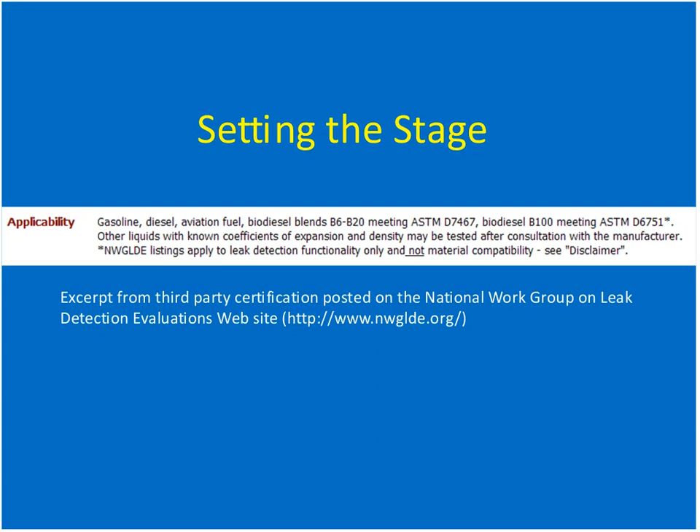Curt Johnson has been an environmental engineer with the Alabama Department of Environmental Management since 1984 and has been in the UST compliance program since 1989. Curt's duties include the review of cathodic protection designs and tests, the writing of new and revised UST regulations, and providing technical support to the UST compliance section concerning leak detection and cathodic protection issues. Also, Curt is currently chair of the National Workgroup on Leak Detection Evaluations, which he was instrumental in forming in 1993. Curt has a BS in Civil Engineering from Michigan Technological University.

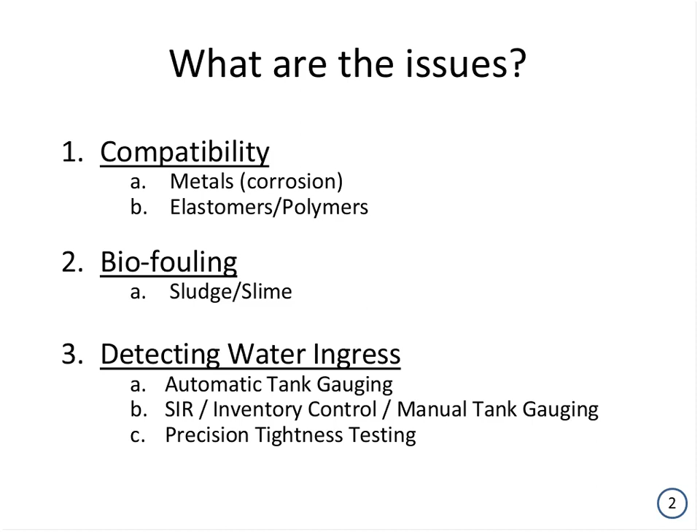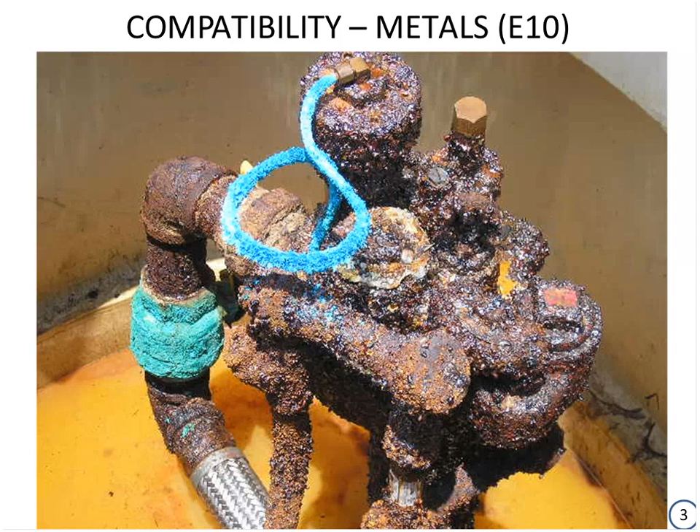But when we say metallic corrosion, I think we're all familiar with this compatibility issue we have with ethanol blended fuels, namely seen within containment sumps at the tanks. This is fairly common these days. We think we've got a pretty good understanding of how this is happening, so we'll discuss how it's impacting our leak detection ability.

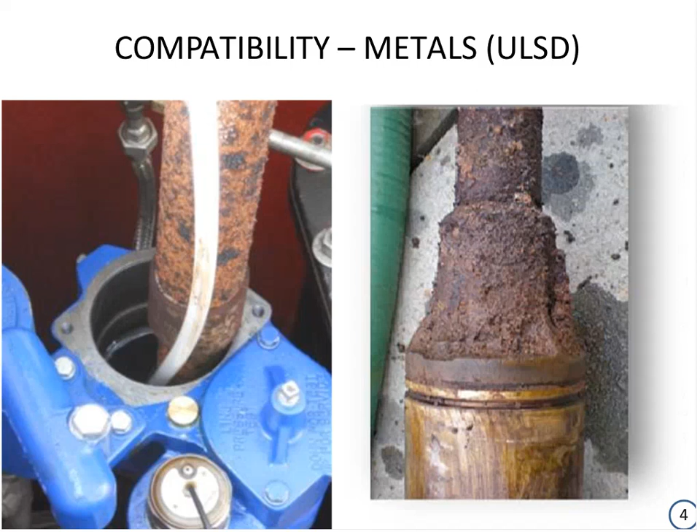We'll also talk a little bit about what's going on with ultra-low sulfur diesel and/or biodiesel blends that are causing some of these same sort of issues with this crud, for lack of a better term.

One of the things that probably has the biggest impact on leak detection right now is our mechanical and electronic automatic line leak detectors failing, apparently as a result of not so much a compatibility issue with the leak detector itself, but just corrosion in general.

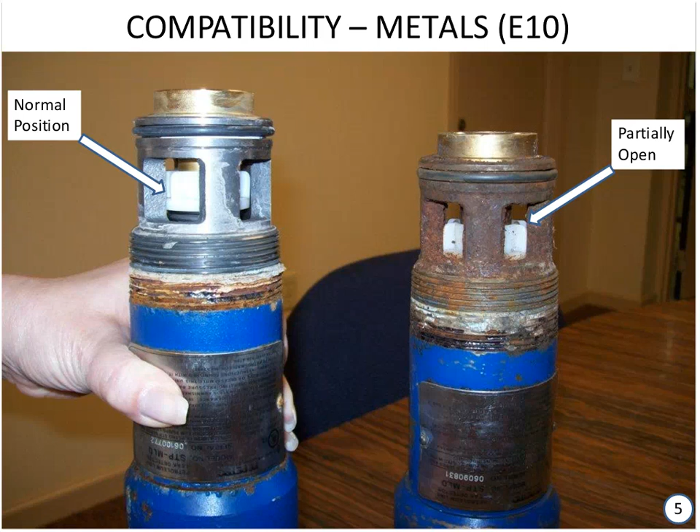I think what's happening - you can see on the leak detector on the left-hand side of the screen, that's a normal one fully in the tripped position, restricting flow. The one on the right is partially blocked open. If we go to the next slide, here are two others that are fully wide open, blocked open - unable to function.

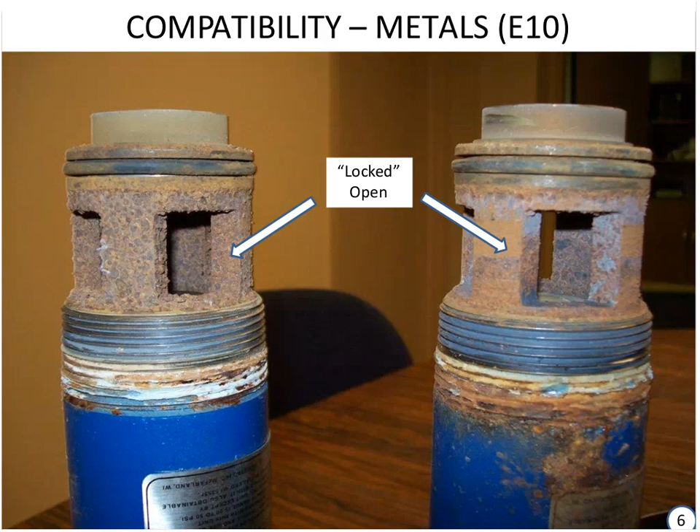I believe this is simply a result of this crud and junk, these corrosion products, clogging up the plumbing, so to speak. These are simple mechanical spring-loaded devices, and I think what's really happening is the corrosion product is just clogging them up. So it becomes troubling to see this kind of stuff going on with something as fundamental as an automatic line leak detector.

Also related to line leak detectors, we have all this metallic corrosion going on within these sumps. One thing we've noticed is the little copper vent tube on these leak detectors is being corroded and rapidly attacked by various sources. You'll notice in this picture that the copper tubing is almost black, a dark gray-black color. This is different than what we typically see as the nice bluish-green copper acetate crystallized mineral we associate with ethanol corrosion or acetic acid corrosion.

I believe what's happening here is a fundamentally different phenomenon. We see this and almost believe that this is a fungus growing on this copper in this environment, causing this to happen.

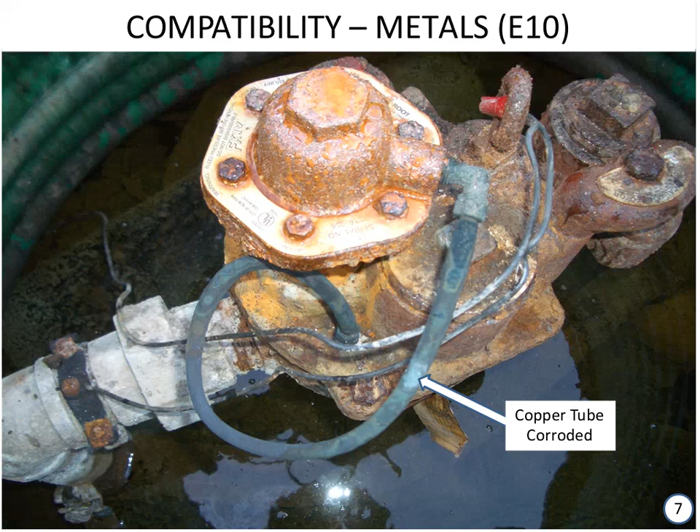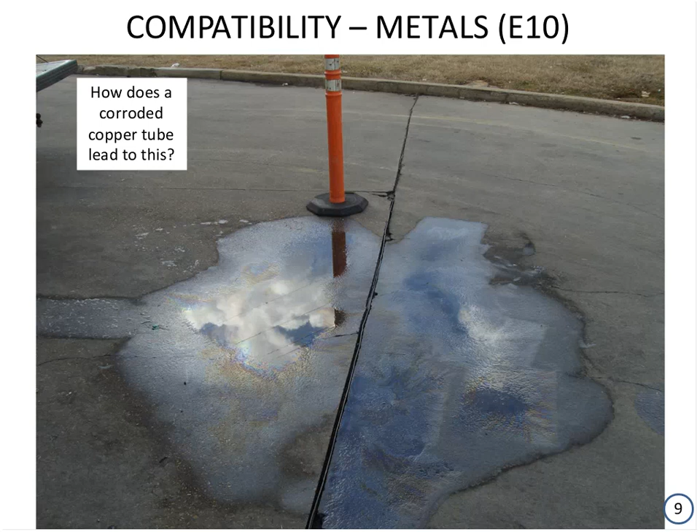This was a place actually in Mississippi that had a 300-gallon release from a failed copper tube on a leak detector. There are all kinds of leak detectors out there - this particular one that caused the 300-gallon leak was an older one, the old PLD, or piston leak detector. In Mississippi, we're like a lot of other people with these older systems - they may not even have a containment sump of any kind.

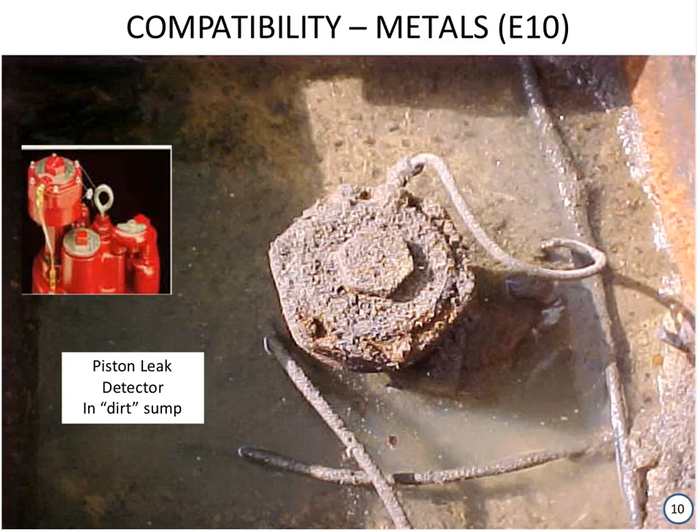Some of them are just buried in the sand. We have a lot of water, very high water table. So if the copper tubing breaks or gets a corrosion hole in it, the way these things operate, they will actually suck in water. This is a common way that water gets inside tanks. But in this case, it was actually under the sand too, so it actually sucked in sand when it sucked in the water through this copper tubing.

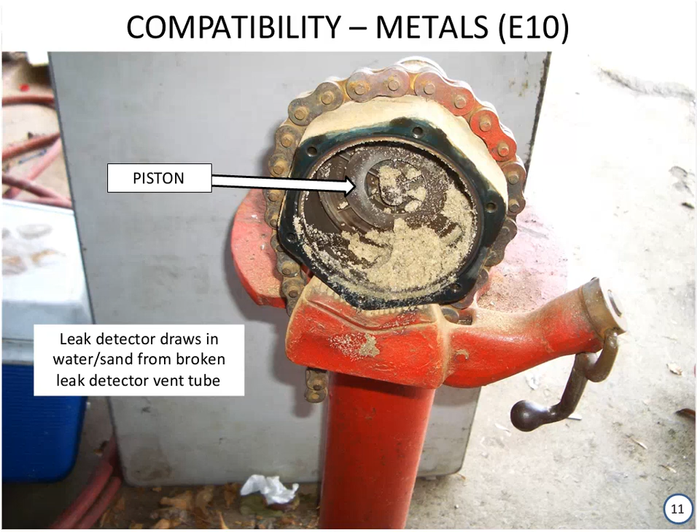So when it pulled this sand into the piston of the leak detector, this particular model is kind of unique. It has a pressure relief valve built into the piston itself, and you can see it pointed out by the arrow there. It's a little spring-loaded valve meant to relieve excess pressure, and that's one of the reasons the leak detector tube is on there, for the fuel released through this pressure relief valve to drain back directly into the tank.

Because the sand got into this leak detector, it propped open the pressure relief valve, and the leak detector tube was broken. Whenever the pump cut on, it was just blowing gas straight out into the environment through the broken leak detector. About 300 gallons were lost before the product started coming up through the expansion joints in the concrete. So I think you can see this is something we need to be concerned about. It completely disabled the leak detector and caused a 300-gallon release, so this kind of stuff needs to be looked at.

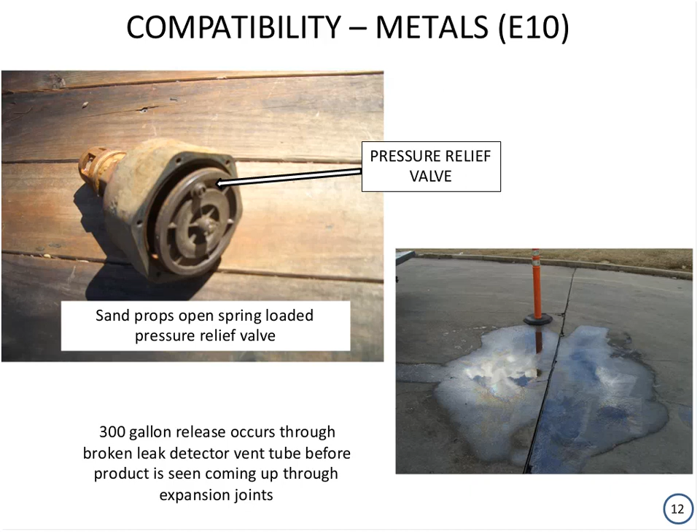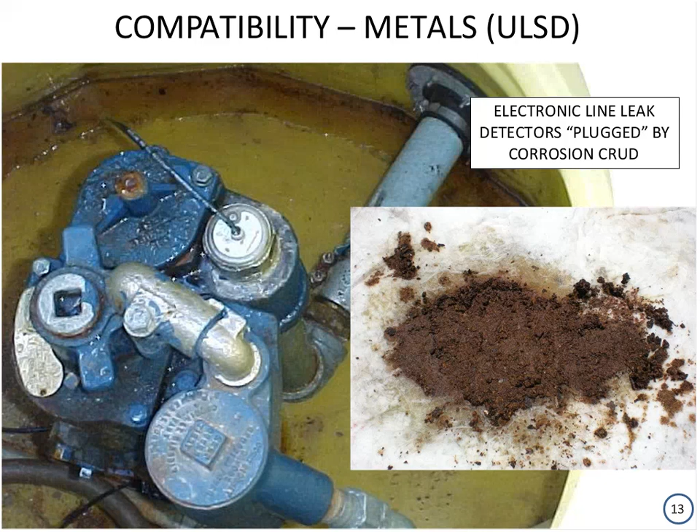Moving on to electronic line leak detectors. I've had numerous reports from several different people that their electronic leak detectors are also not passing the annual functionality test. Not everyone does annual functionality testing on leak detectors, but it is a requirement here in the state of Mississippi and some other states. We're starting to see some of these fail the annual test, and when we take them out and look at them, the best we can tell, the problem is that they're essentially plugged up by all this corrosion crud coming through the system.

So once again, more corrosion products causing problems with the functionality of these devices. And everyone knows that aluminum is not, quote, compatible with ethanol. So here's a picture of an automatic tank gauging probe that has been corroded by ethanol, apparently, and there's a question mark here because I don't know specifically what caused this probe to be corroded, but it was in an ethanol-blended tank, so I can sort of make a connection, but I can't definitively say this is what caused it. This kind of stuff happening to a tank gauging probe doesn't look good for whatever reason.

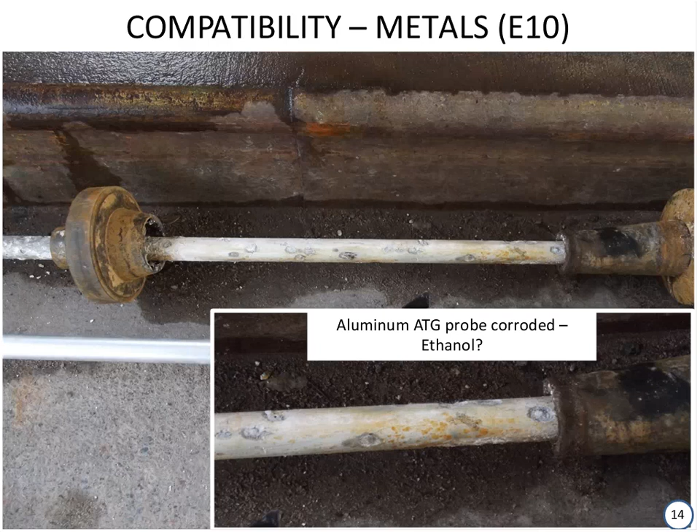Then, not directly related to our leak detection equipment, but sort of indirectly, a shear valve will prevent a leak, right? If someone crashes into a dispenser, knocks it over, the shear valve breaks and trips, stopping the flow of fuel even if the pump is running. So that's the fundamental intent of a shear valve. This is in here simply to point out, again, all of this corrosion crud and junk being pumped through our system is causing a serious issue.

Here, these shear valves are unable to pass the annual functionality test. And again, not everyone does functionality testing on shear valves. It is a requirement here in the state of Mississippi through the Department of Environmental Quality, and the fire codes have always required shear valves to be tested. So I point this out because this is a very important issue. It's a fire safety issue of critical importance, and people need to be aware that this is what's going on with shear valves these days. If you haven't seen this, I think you will in the near future.

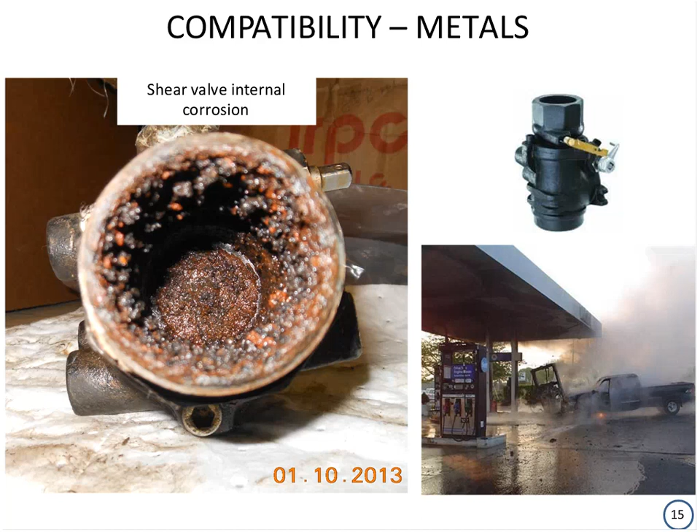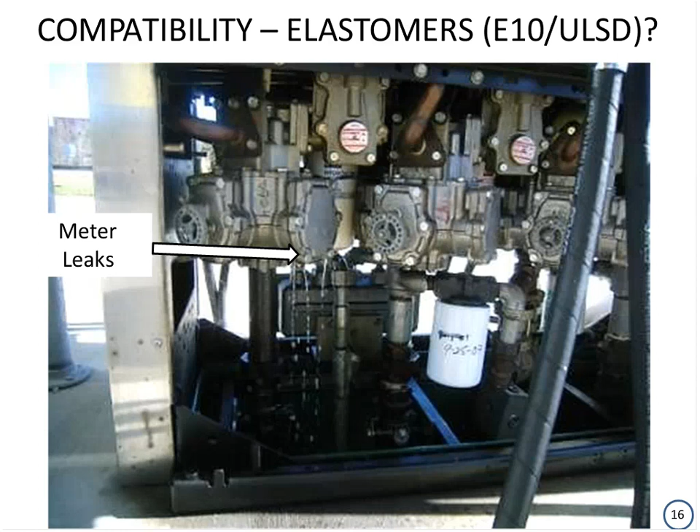So then we can talk a little about elastomers and polymers. We've got lots of compatibility concerns with some of these different seals and gaskets, and we've all seen the leaking meters and all this stuff going on. I can't directly attribute this particular meter leak to an ethanol compatibility failure, but I still continue to get quite a few reports about gasket failures with not only ethanol-blended fuels, but probably more so related to ULSD. Quite a few issues apparently with older gasket systems and ULSD. So we don't really have any way to detect this leak unless we happen to have a containment sump under the dispenser, and we happen to actually be monitoring that sump, then we would see this leak. But otherwise, it probably would go undetected.

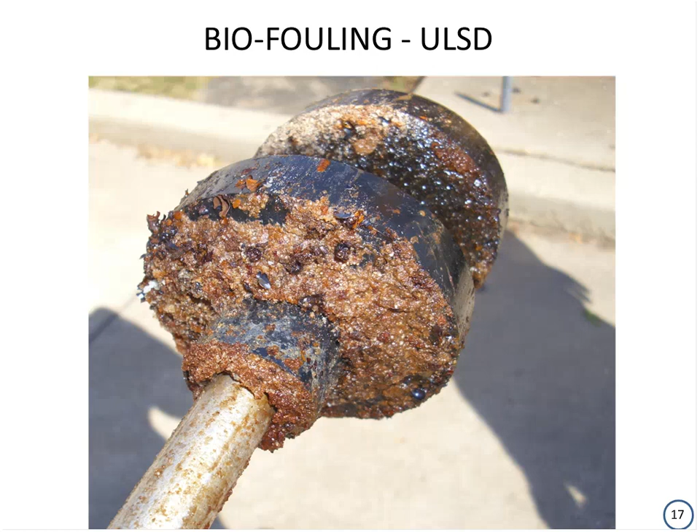So they called the service tech in, they came out, pulled the probes, and this is what they saw. When a probe gets crudded up like this, it's not hard to figure out that it doesn't have the same buoyancy or density that it should—that's the water probe and the fuel probe in this picture, and it gets all this extra weight on it. It's not going to function as designed.

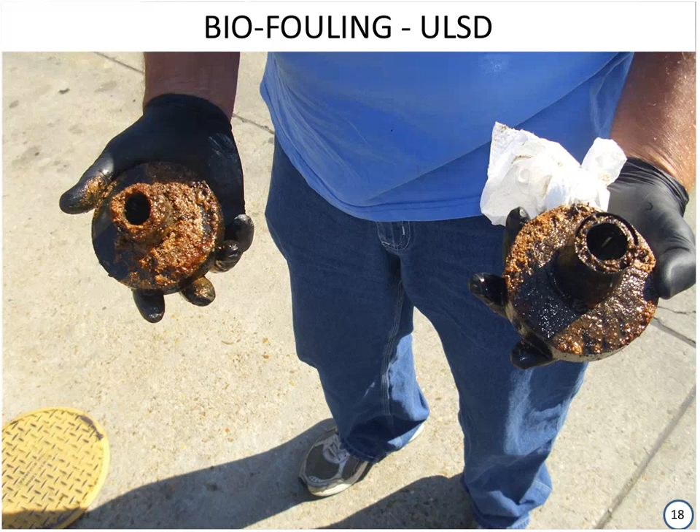But the other thing that was very interesting about this one was the first time I had seen this, and have not seen this again. The way these probes work, as you probably know, they're magnetostrictive devices. They have a little magnet installed in the float, and the magnet moving up and down the shaft is what causes the Veeder-Root or the tank gauging system to read the fuel level or the water level.

So when we pulled this one out and cleaned it up, amazingly enough, the little magnet inside the float is virtually gone. So we don't know—it was not physical damage apparently. It appears to have been attacked by some sort of corrosion issue on the magnet itself. So that one was very unique.

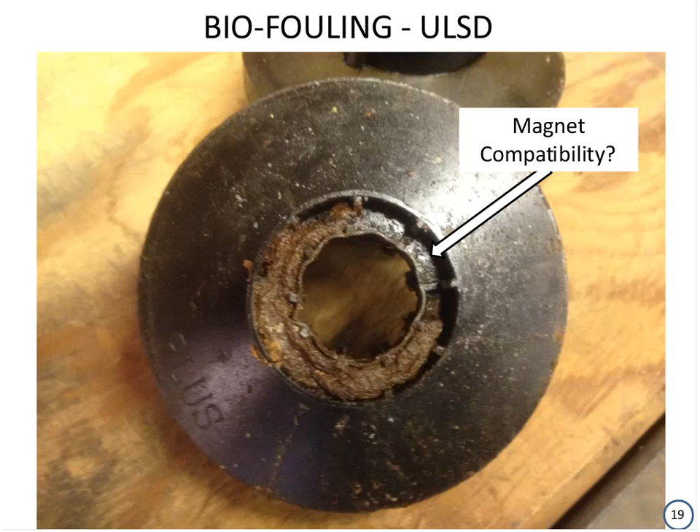That obviously does not lend itself to effective leak detection when you've got this kind of business going on. Then the third general broad topic is, of course, water ingress. This is something I have been talking about for several years now. I gave a presentation at the 2009 conference on this very subject, and we're still talking about it today.

So water ingress with automatic tank gauging systems is something we need to be paying a little attention to, because fundamentally these systems are very simple the way they operate. It's nothing more than a probe with little floats on it. The product float and the water float are of different densities. The water float has a density that is heavy enough to sink in fuel but float on water.

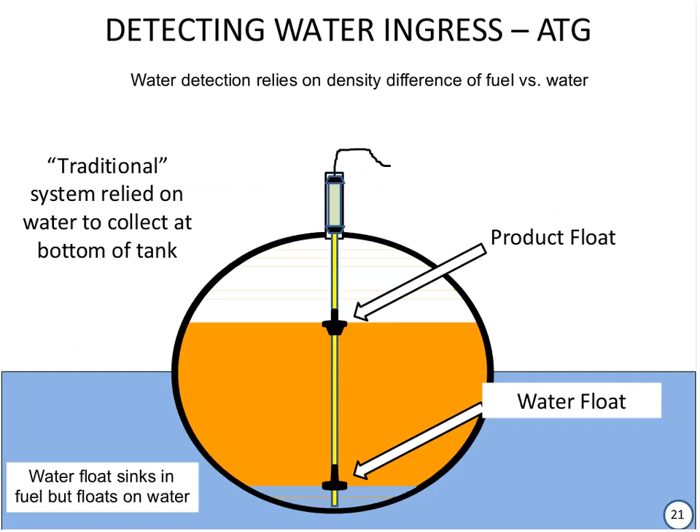So they simply rely on a very basic operation: water that comes into the tank will collect on the bottom of the tank. If enough of it collects, it will pick the float up and trigger the water alarm. So what does that have to do with leak detection? Well, my fundamental premise is that if you have a hole in the tank, you can have a leak, of course.

So in Mississippi and a lot of areas of the country, we have very high groundwater. So getting a hole in the tank does not necessarily mean you lose product out of the tank initially. Rather, you have water ingress—water enters the tank. So water entering the tank can mean there's a hole in it, just like product leaving the tank can mean there's a hole in it. It's fundamentally related—whether you get water in the tank or product out of that hole just depends on the groundwater, and groundwater does fluctuate.

So I think it's important that we be able to detect water ingress quickly. Now we've got this same automatic tank gauging system that was designed for our conventional fuels, and we've taken ethanol-blended fuel and put it in the same tank with this same system. Can we rely on this system to detect water ingress effectively? There's still lots of questions about this, but fundamentally, the concept is pretty straightforward to me.

Water that enters an ethanol-blended tank may or may not actually ever make it to the bottom of the tank, and if it does make it to the bottom, it will not just sit there and collect—it will mix with the ethanol in the tank. So we cannot rely on the fundamental operation we've always relied on, that water does not mix with gasoline. That is no longer true.

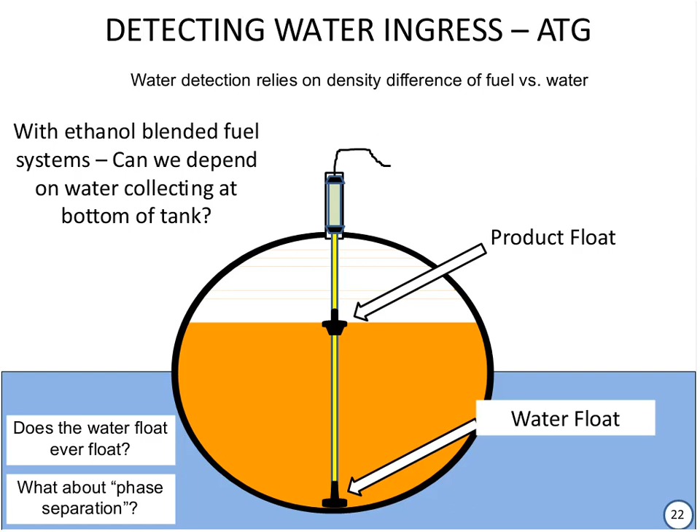So we can apply this same water ingress problem to simple leak detection methods like inventory control, SIR, or manual tank gauging, because all of these rely on the ability to detect water ingress into the tank also. We've traditionally done that with nothing more than a gauging stick and some product and water finding paste on the stick.

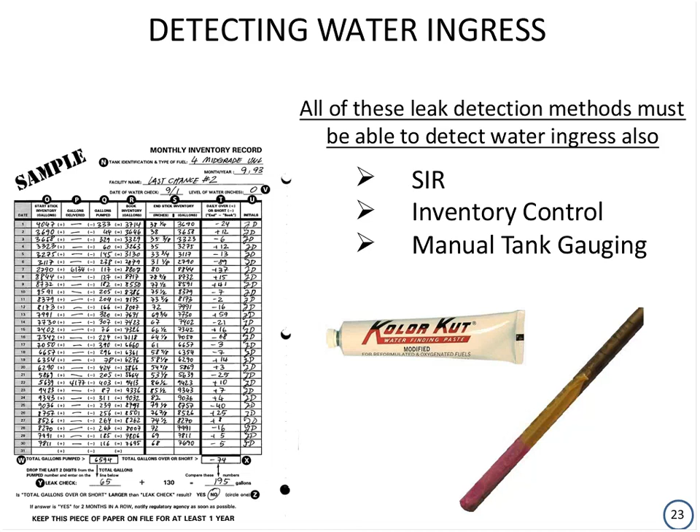Anyone who has done this in ethanol blended fuels, even with the new formulated water finding paste, can find that this can be quite tricky. It's a little tricky to interpret the results, and it's just not as straightforward as it used to be. So no matter what you're doing, detecting water ingress into these ethanol blended tanks has become a little problematic, causing us to question our ability to detect a hole in the tank that's allowing water into the tank.

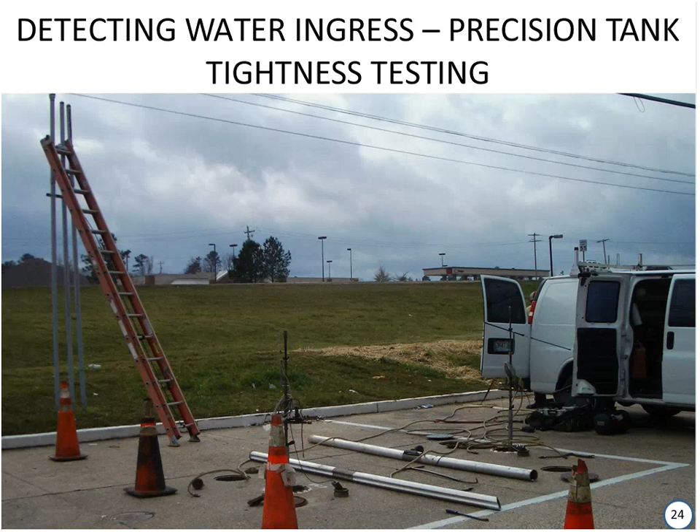Finally, this thing about water ingress—we talk about the ultimate in leak detection systems, and that is a precision tightness test. It has the lowest threshold, a 0.1 gallons per hour threshold. So this is like the ultimate, right? But most of the tightness testing done these days is done with some fairly straightforward systems.

These systems rely on a water sensor placed at the bottom of the tank whenever there is water on the outside of the tank. So if you do have groundwater above the bottom of the tank and you happen to have a single-walled tank, these systems rely on a water sensor that is physically placed at the bottom of the tank.

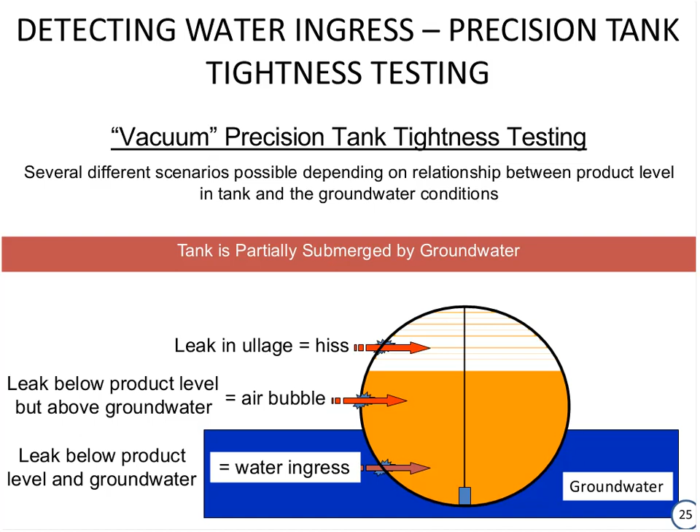And I think you can see from that the implication is obvious again—we are relying on water that enters the tank to go to the bottom of the tank and sit there and collect, to give the water sensor the opportunity to discover this leak. So this raises a whole host of issues when you have groundwater to deal with in single-wall tanks.

Namely, again, I believe that if we are going to claim to be able to detect a 0.1 gallon per hour leak from the tank, then that means we have to be able to detect a hole in the tank that is equivalent to 0.1 gallons per hour. Whether that hole lets water into the tank or lets fuel out of the tank is almost irrelevant to me. A hole is a hole. We should be able to detect it.

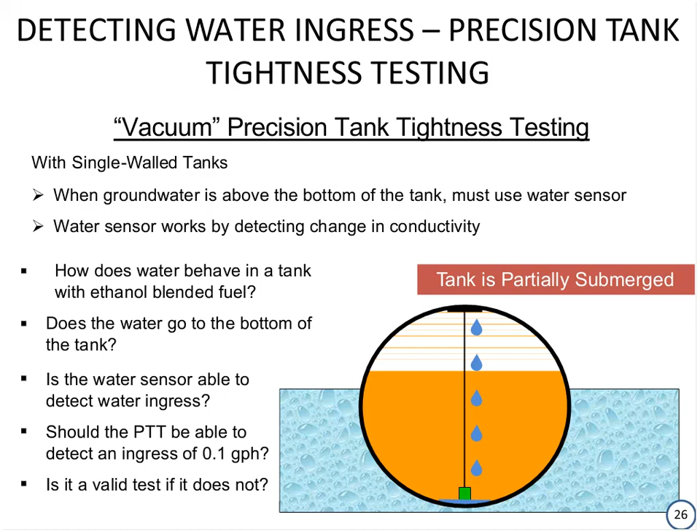So there's a little bit of a debate here about what's going on, what it means. The protocol does not adequately address this as it is written, and as Ann will probably tell us, the protocols are being evaluated with the hopes of making them better and changing this so that we will be able to require that a tightness test be able to detect a 0.1 gallon per hour ingress of water. In my opinion, if it's not able to do that, then it simply is not a true precision tightness test.

All right, that is really all I have. Very brief, very short, and that's it.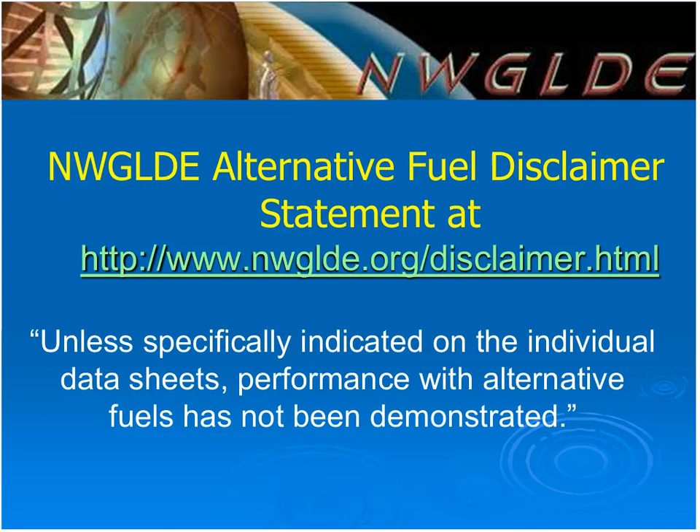As already mentioned, this disclaimer statement resulted from our review of a white paper that was submitted to the National Workgroup in 2010. The title of the white paper is 'Effects of Biodiesel Blends on Leak Detection for Underground Storage Tanks and Lines,' and it was written by third-party evaluator Ken Wilcox and Associates for the Biodiesel Industry Advisory Panel.

You can find a copy on our website at NWGLDE.org by clicking on Downloads on the left side of the page, and then paging down to where you'll see Alternative Fuels White Papers.

The author used reference materials and his knowledge to determine the expected performance of each of the release detection technologies when used to detect releases with biodiesel and different blends of biodiesel. The conclusion of the white paper is that there are only a few vapor-dependent release detection methods that would need to be evaluated with biodiesel B6 through B20 blends and B100. These methods are already known to not work well with 100% diesel due to its low volatility, so it's no surprise they would probably not work with biodiesel blends either.

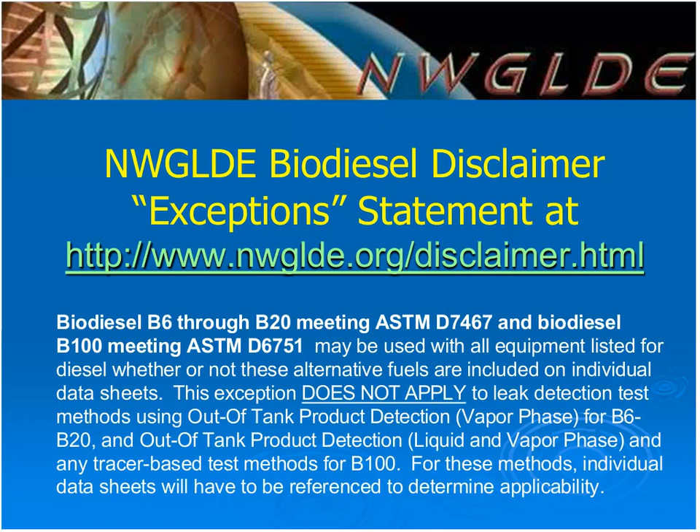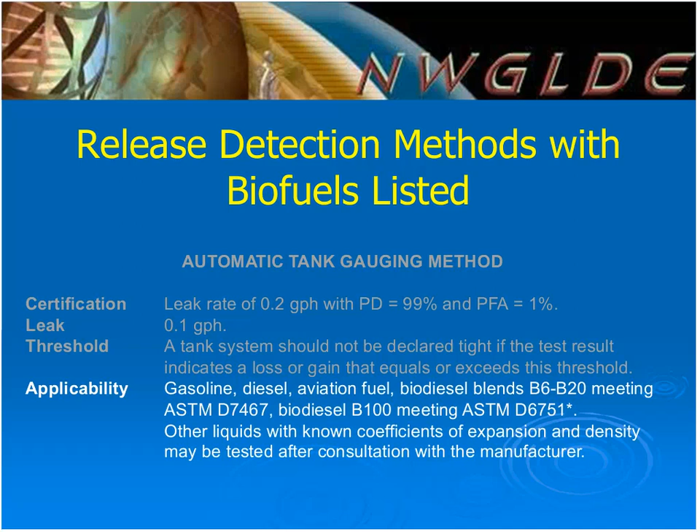Like the example data sheet shown on the slide, there are quite a few other release detection data sheets that list biodiesel and biodiesel blends.

Our initial policy, after review of the biodiesel white paper, was to require owners to request the addition of biodiesel and biodiesel blends on each data sheet if they believed it fell within the parameters of the white paper. We had quite a few manufacturers request this, and it soon got out of hand. We discovered that this would become a very tedious task if we were to continue, since we have over 400 listings on our list.

So instead, we listed all of the applicable release detection equipment at once using the disclaimer statement shown on the previous slide. Therefore, even though you do not see biodiesel in the applicability section of a particular data sheet listing, that does not mean it is not included.

And of course, you do need to look at our disclaimer to see how that works. If the release detection equipment listed on our website fits the parameters in the disclaimer shown on the previous slide, then the biodiesel blends are applicable.

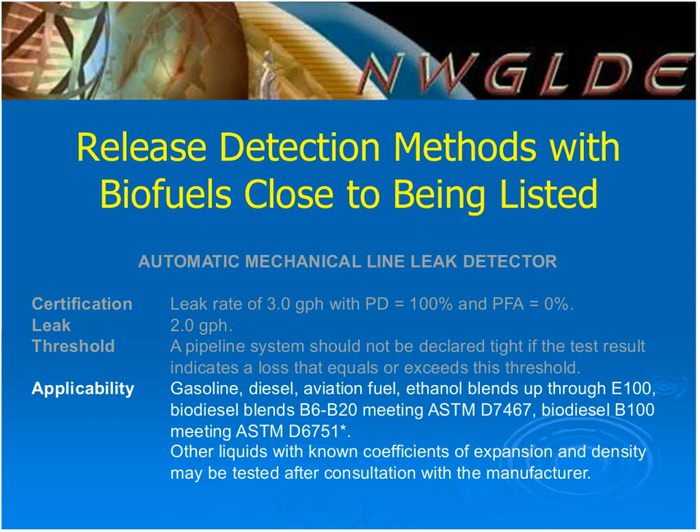I've already discussed most issues preventing biofuels from being listed, so I'm just going to summarize them here. Based on the workgroup review of the biodiesel white paper, there are a few methods of release detection equipment that we agree are not applicable for diesel, and therefore will probably never be able to have biodiesel or biodiesel blends included in the applicability section of the listing.

Also, to ensure that homemade biodiesel is not approved for use with release detection equipment, the workgroup will not list biodiesel B21 through B99 on any listing until there is an ASTM standard available.

The National Workgroup review of the functionality and applicability discussed for release detection methods in the final Battelle technology assessment will probably indicate that some methods should be listed in our disclaimer as not being acceptable for use with either ethanol or ethanol blends. But that remains to be seen.

Other release detection equipment which do not fall into the above categories either already are listed as applicable for some or all biofuels, or have the potential to have all the biofuels indicated as applicable on their workgroup listings. It is left up to the release detection equipment manufacturer as to whether they want to pursue evaluating their equipment to allow biofuels to be added to their listings.

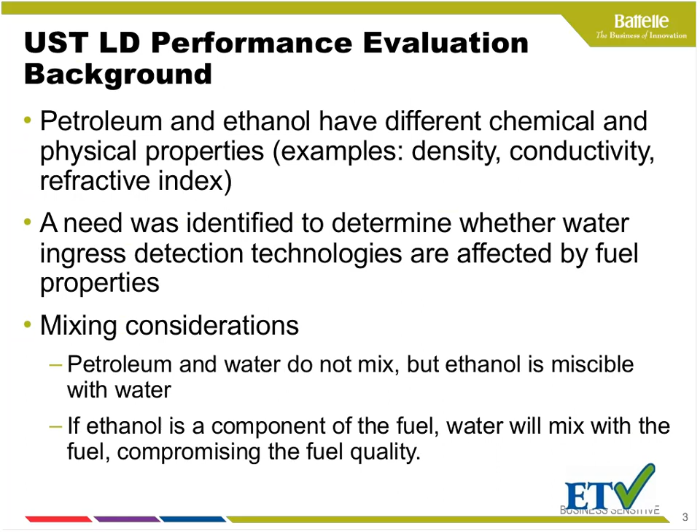The way we went through this research is that we followed a specific process called the Environmental Technology Verification Process. This is a voluntary program that basically gathers data in a third-party way, credible data, without comparing or judging anything. This is how it was tested, this is the parameter we were testing, and this is the result for it, so that decision makers have the information that they need to make their decisions. Battelle runs this program under the Advanced Monitoring Systems Center, and we do this through a cooperative agreement with EPA. It's been about 15 years now. We do multiple different kinds of monitoring, detection, sampling, and characterization technologies.

And it is this third-party verification process that follows a peer reviewed QAPP. When we use the word verification, sometimes there's a little confusion about what that means, so I put that down here. Specifically, when we say verification, we're just saying they went through the process: we collected performance data, and these are the data. We're not certifying, we're not saying that they meet a standard, we're not giving them a stamp of approval, and we're not making any judgments, okay?

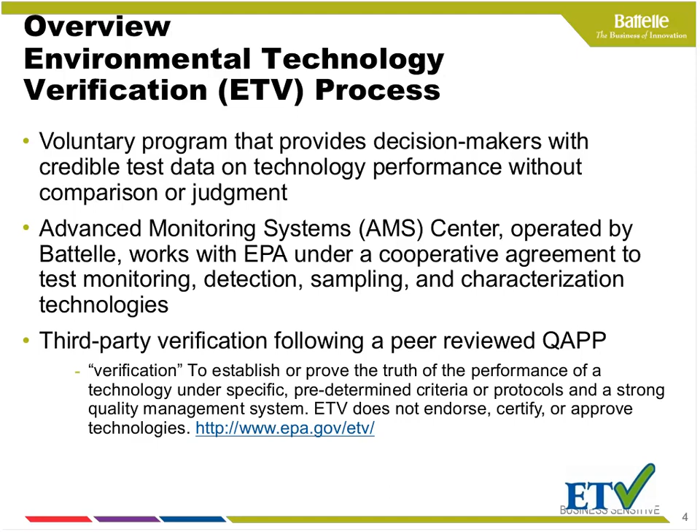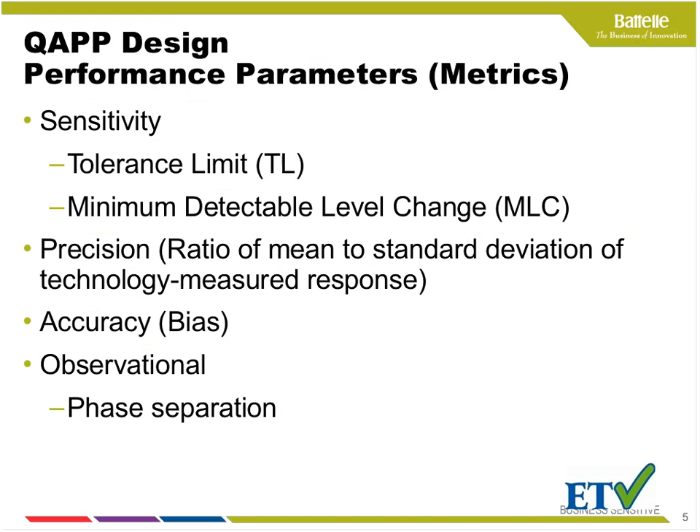So technologies, the ATGs, have already gone through this process with diesel fuel or gasoline, but mostly diesel was used for the initial testing. So this is kind of following that same process. We also wanted to look at precision, accuracy, and then any kind of observational information we could gain, especially with respect to phase separation.

We basically organized this test into two main tests. The first test is the detection of water with a continuous ingress. The difference between the different portions of this test is that we ingress the water continuously with a splash or without a splash. When we had a splash, we wanted the water to free fall, say coming from the top of the tank, falling into the fuel and going down the fuel column, interacting as much as it would with this certain splash and mixing around.

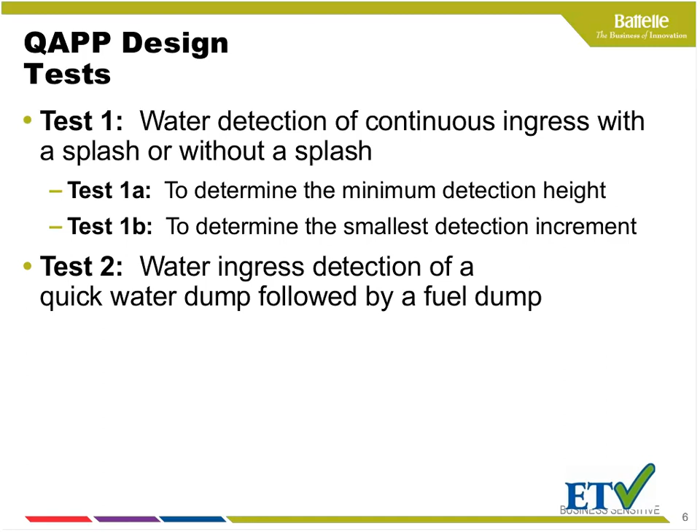When you have no splash, what we did was move the water delivery tube close to the fill tube so that it actually had a surface it kind of followed down as it fell, then went through the column along the fill tube and went directly to the bottom. So there wasn't a big splash. There was minimal interaction with the fuel column, but it just kind of followed along the drop tube.

The second test was really looking at a catastrophic water ingress, some kind of dump from the spill bucket, where a lot of water would come in at the same time, maybe some kind of runoff from rainwater or something like that. We looked at whether the water was detected as that large ingress, and then what would happen after you got a fuel dump. So that's kind of where the throughput issue comes through that Curt was talking about.

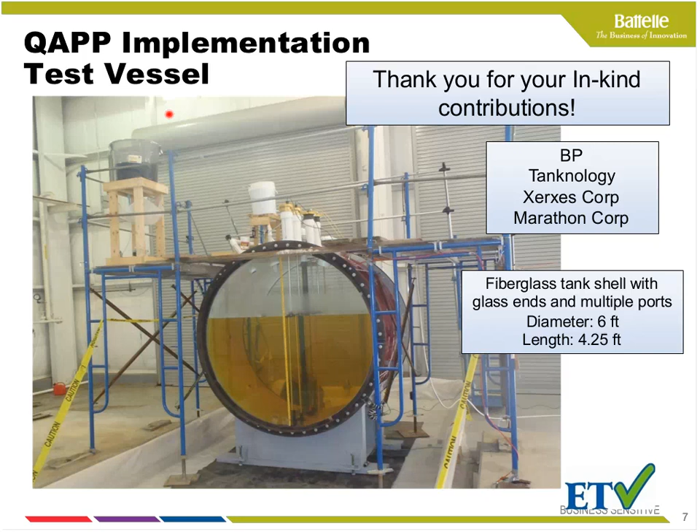Jacqueline? Oh, yep, there you go. Sorry, I'm going to go back one more. Uh-oh, is everyone's screen black? No, we're on the video, that first splash video. Oh shoot, are you? Maybe I didn't see it. Did it freeze? Can you see it? Yeah. Is that the slide you want? Did your computer freeze? I just have a black screen entirely. I have the little NWGLDE monitor box up top right, but that's it. Okay, did you try moving to a different slide? Okay.

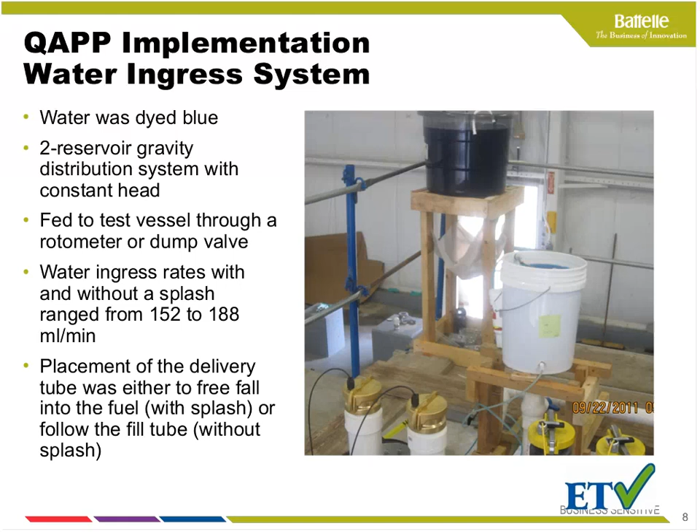So only the file owner can play this media file, is it? Oh okay, so that must be me. Do you want me to play it while you talk? Okay, I'm going to take the ball away from you. Sorry, that's perfectly fine. And which one did you want, the with splash or without? We'll do both. All right, this one's the with splash, or I'm sorry, without splash. All right, I'm going to hit play.

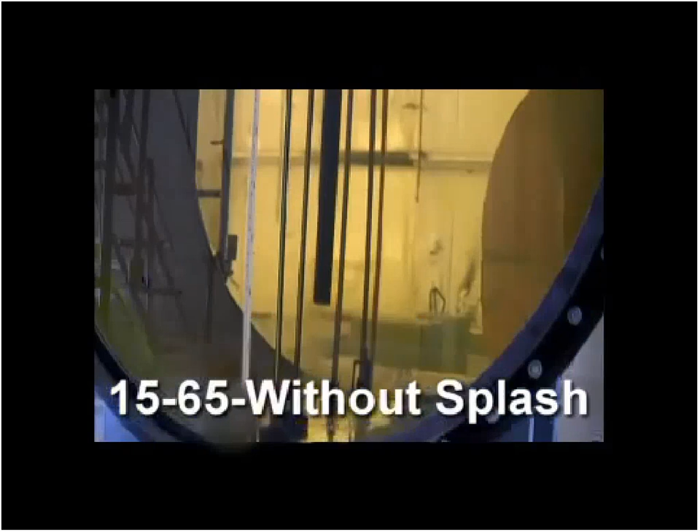Okay, so it actually should say E15 at 65% level without a splash. And so as you can see, this is where the water is kind of going along the fill tube, as I'd mentioned before, and collecting down at the bottom of the tank. So there is some mixing going along the tube here, but it is generally all getting to the bottom of the tank.

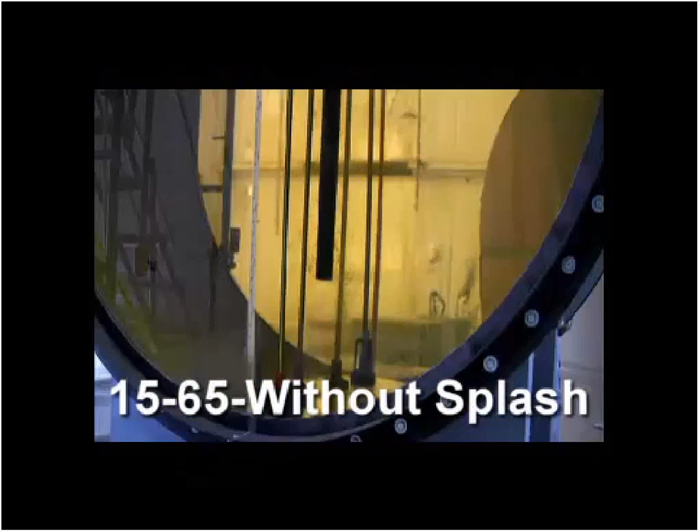Okay, and the next video is with a splash. Again, it's E15, and the water is starting out at a nice vibrant blue color. The fuel is yellow. As it comes through the fuel column, you can see it spinning around a little bit. It does kind of turn green, give the appearance of green, I guess, and then gets to the bottom and collects. Very similar to the other without-splash scenario.

Okay, I'm going to hand the ball back to you. Great, thank you. And then you have control again.

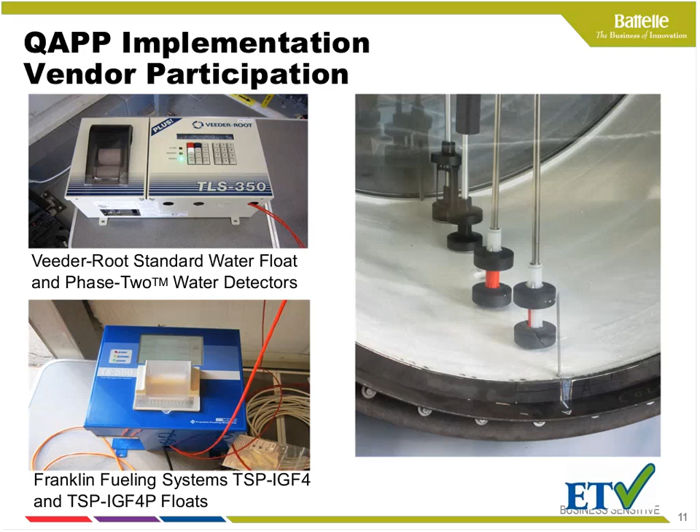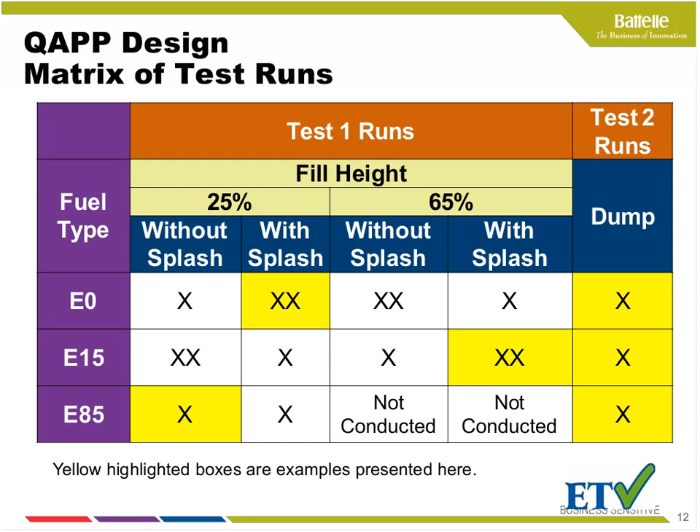So the highlighted squares in yellow here are the examples that I'll be going through over the next couple slides, to give you an idea. If you look at the E85 line here, we did not conduct the 65% full level with those tests, because what we found in the 25% level is that our tests were basically inconclusive. We would run a test where we would expect the technology to alarm within an hour, maybe an hour and a half. That's how we set up our flow rates, given information that we had from the vendors. And then we basically decided a test would be over in 3 hours. So if it was expected to alarm at 1, and if it didn't alarm 2 hours later, then we basically aborted the test, which is what happened with the E85.

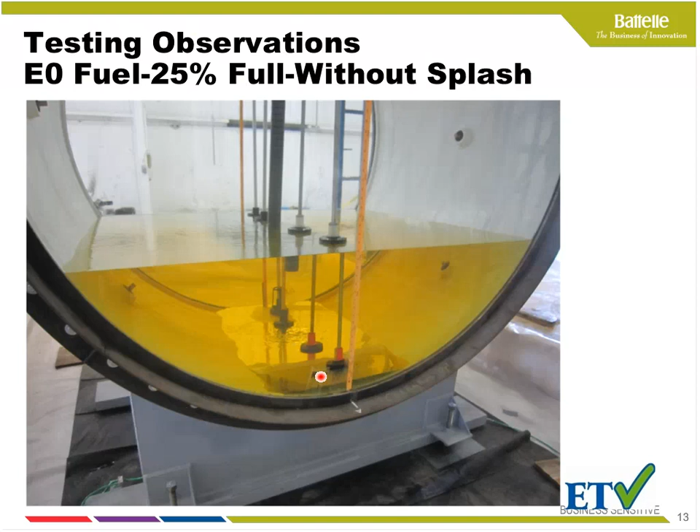A lot of times tanks have debris or sludge, or maybe they don't at installation but know it's going to happen over the next couple of years, so there's space built in so it's not sitting directly on the bottom of the tank. That would actually help with what we saw in the pictures from Kevin, where there's a lot of deposits on the floats — being a little bit above the bottom of the tank means it's not as affected by those fouling issues.

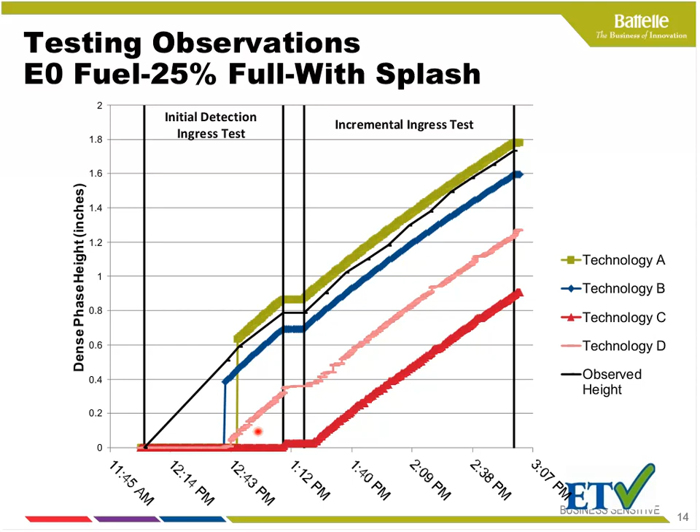So the bottom 2 technologies here were basically installed just a smidge higher than these other ones, which were actually a little more in line with what we saw.

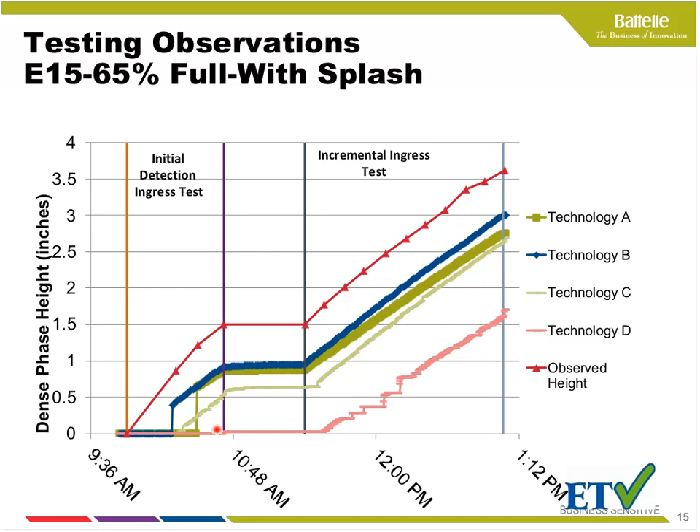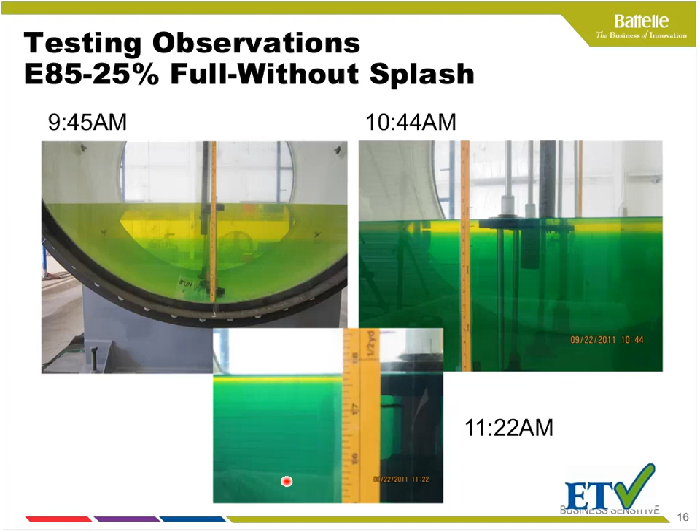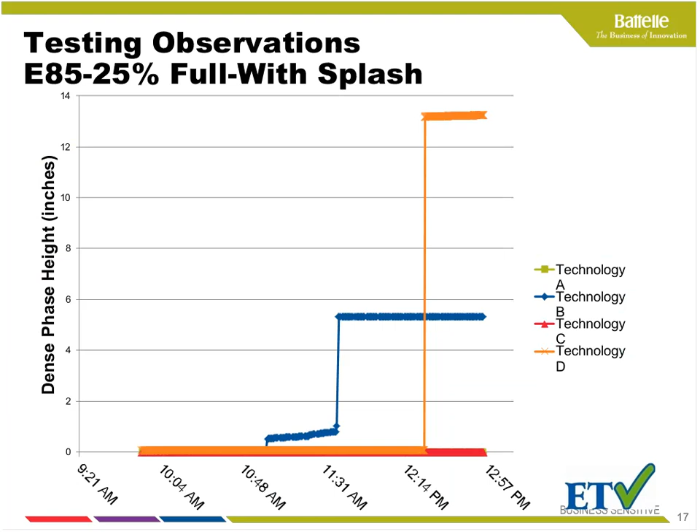This is the computer readout of what the technology saw. Basically, all 4 are down here, and then these 2 jump up, but that's not a reality — this one pegs out at about 5.5 inches, that's as high as it would ever go, and this one pegged out at 13 inches. So this ended up underneath the fuel float, because at 25% full, it was about 17 inches in height overall.

Moving on to the dump tests. This is kind of where we might need to bounce back and forth, Jacqueline, so you want to just move through the slides for me at this point because of the videos. But basically, this is what we had as an output for the technologies during the dump test with E0.

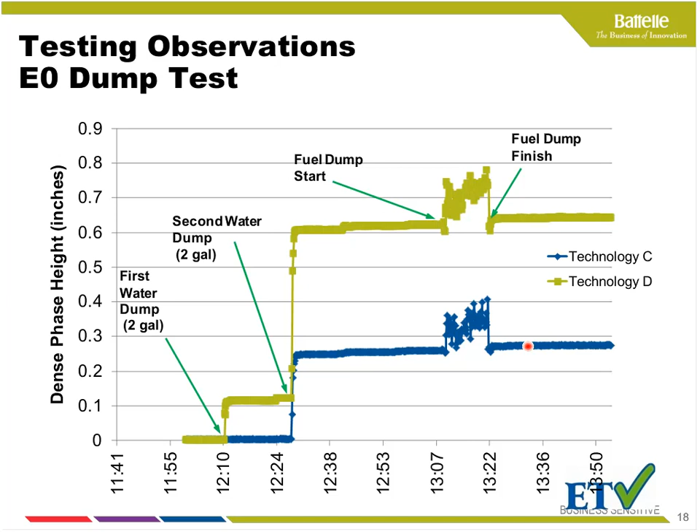And Jacqueline? Okay, I'm going to take the ball away from you. And I'm going to hit play.

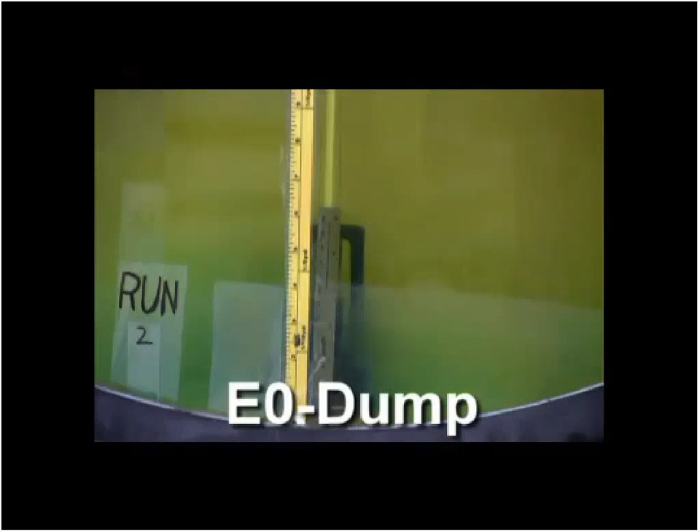Okay, so this is an up-close look at the tank bottom, and the water is going to come in. There it goes. There seems to be a delay on my computer.

Yeah, it seems kind of pixely to me. I hope it looks a little better for everyone else. But you can look at it some other time when it's not coming through the webinar, and it probably would be a lot clearer for you.

So you'll see at the bottom, it says the E0 dump. The bottom is blue, and basically the fuel looks a little hazy right now, but it becomes a nice clear fuel again. So the water is nice and separated.

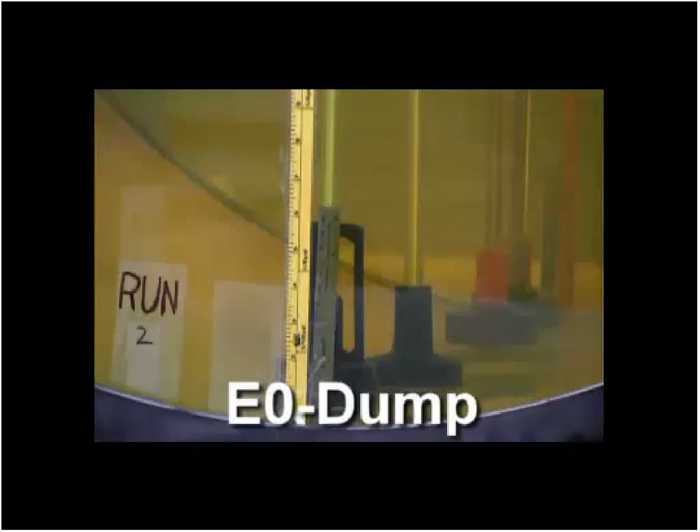Okay, next. The E0 dump, what you'll see here is the initial water dumps. Both the technologies went at the same time with this one. And when we started the fuel dump, what happened was the water float technologies were startled by the turbulence and then went straight down to the bottom of the tank and didn't move for the rest of the test. So the water was detected after the water was dumped, and the water was detected before the fuel dump, but then the water was not detected after the fuel dump.

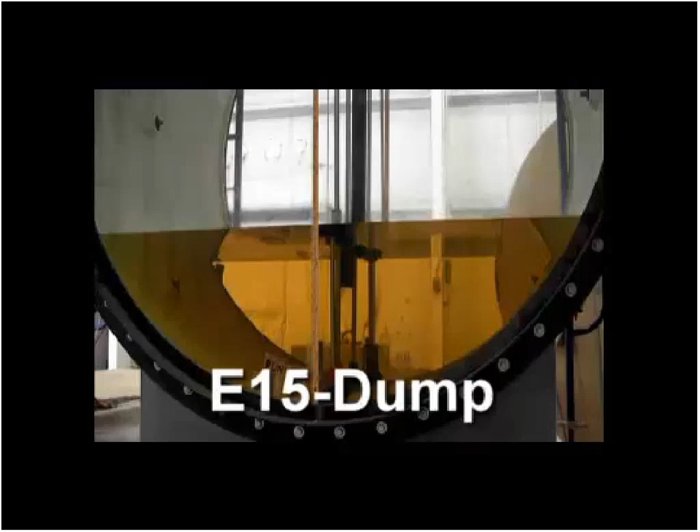Okay, and I've got a video of that, and that's kind of not as close up, to give you a better perspective of the tank.

There's a lot of buffering going on with mine, I think. There, it just came on mine, the dump.

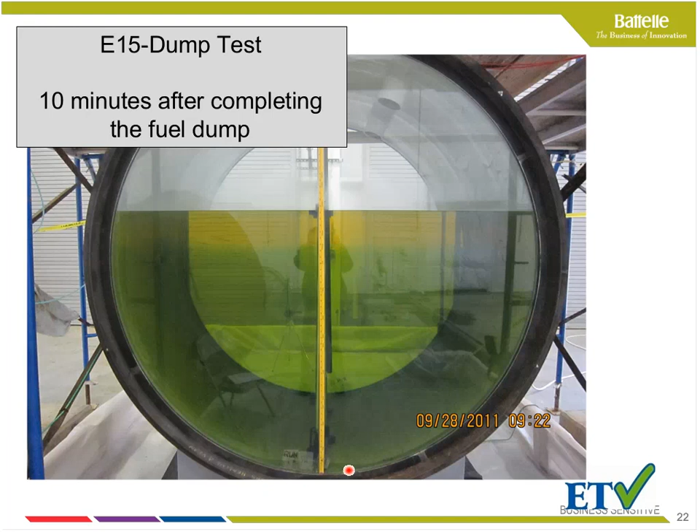All right, the E15 dump test did pretty much the same thing as the ingress tests. It was very inconclusive. The water came in, and it was very dark. Some actual water ended up at the bottom of the tank, and then most of the water ended up into the top portion, and it was nice and green.

Do you want to run the next video? I'll go ahead and, yeah, okay. Just in case anyone is able to see it. I think that last one was probably the longest.

So it's greener on top. It's very dark blue on the bottom. So there is some kind of phase separation there. May not be a true phase separation, it's just kind of like the mixing. And then when we definitely add more E85, the higher ethanol, then all of that gets entrained in the fuel, and it becomes pretty much a solid green color.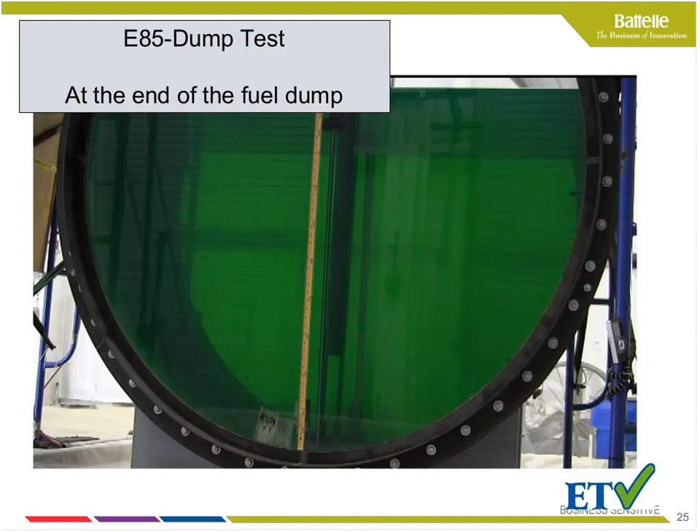So this is what it looks like at the end of the fuel dump after the E85 had all the water in it. It ended up being a very solid green.

This is a summary of the results of the different parameters that we looked at: the tolerance limit and the minimum level change. This tolerance limit is where the technology was installed to be able to detect.

The first two technologies were very similar, a little over half an inch off of the bottom. The other two technologies were installed slightly higher, but their zero point was set where they were hanging in the tank. One technology hangs on a chain and the other is on a rod, so there are little variations when it comes to the actual installation, where it gets zeroed out, and how it performs.

So technologies C and D measured the water at basically their zero point, but that zero point was installed higher in the tank than technologies A and B. You saw that literally they were all responding within the same few minutes in those previous slides, so as far as differences, it's kind of difficult to see with these numbers.

So the minimum level change - the regulation says we need to be able to measure 1/8 of an inch difference. All of these are measuring within 1/8 of an inch. These are at 1/16, this one's at 1/8, and that was the design for that portion of the test.

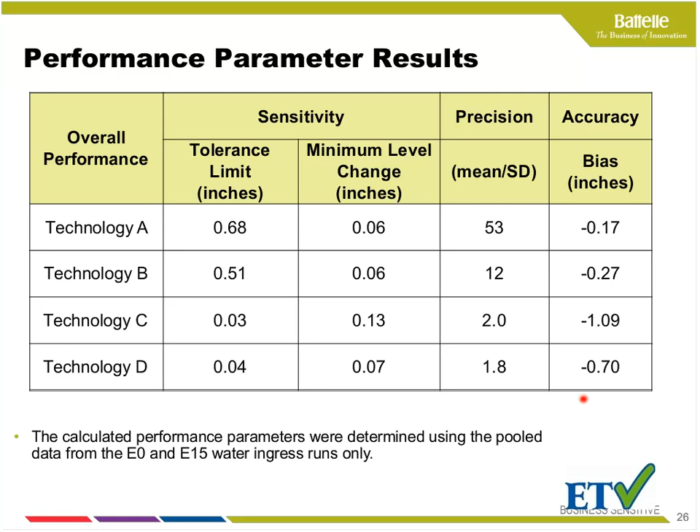Our overall conclusions: the regulation states that water detection technologies should detect water at the bottom of the tank, but it doesn't address anything entrained in the fuel because of this ethanol issue. So there's definitely something that needs to be addressed in the regulation. The water sensors we tested did not detect the water in the test vessel containing either E15 or E85 blends, because the water was entrained into the fuel rather than sitting at the bottom of the tank.

Ultimately, there is not sufficient data to evaluate whether these technologies would indicate a potential release under every circumstance. We can't cover every circumstance, but consider one where you're measuring water and then get a fuel dump multiple times a week or month, depending on your throughput, and then you don't have the water anymore. That's a very common situation where you may have water ingress that never actually gets detected because the throughput keeps that water entrained.

If you'd like to see the reports and verification statements, this is the link to all those files on the EPA website, and the reports have all the data in them - QC reports, everything. The verification statements are about 4 to 6 pages, summarizing the test design and results specific to each technology. There are 4 different verification statements, and then 2 large reports done by the different vendors.

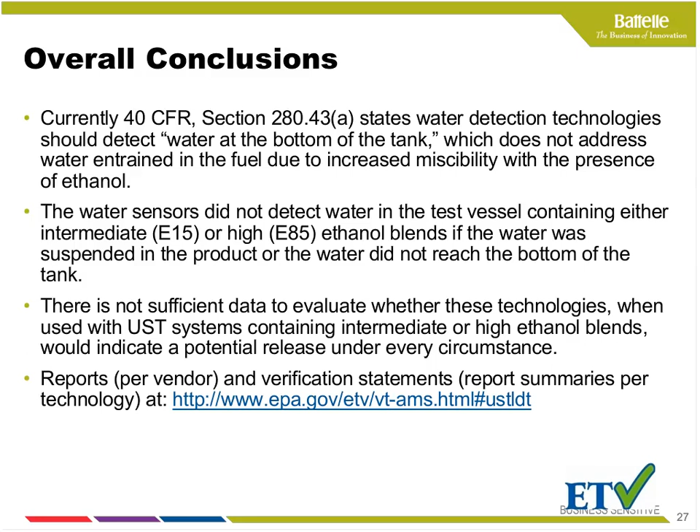So ultimately, what we want to do is ask this question: do UST leak detection technologies work in ethanol blended fuels? We went a long way with that, trying to understand what's going on at a large scale with water detection floats, one of the most popular detection systems used out there. And then we also wrote this technology assessment paper.

Currently it's just pulling together ideas, assumptions, and minimal data. But as we revise it, what we want to do is incorporate the ETV data, then incorporate any data we collect over the next year in our laboratories, and any other data we can find that's out there in the published literature.

So basically, people making these decisions—the National Work Group, government regulators, federal, state, anybody—can have this information to point to and say, okay, I can understand it working this way or that way. The National Work Group specifically will use this paper similarly to how they use the biofuels paper, or the biodiesel paper that Curt was talking about, that Ken Wilcox Associates wrote a little while ago.

So hopefully this tech assessment will really gain traction and pull together a lot of the information that's not necessarily all pulled together into a nice package right now.

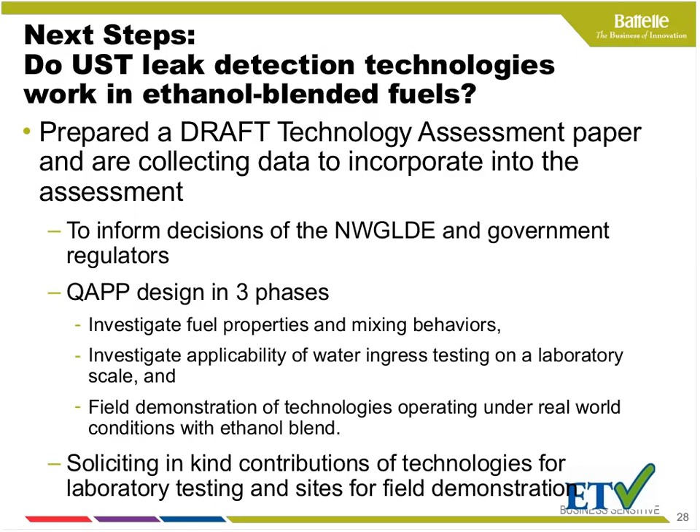I would like to acknowledge a laundry list of people who are part of this first part of the project and are continuing on. We've gotten the research funding from the EPA Office of Underground Storage Tanks and the Office of Research and Development.

The National Work Group has been very involved every step of the way, reviewing all of our documents to make sure what we're doing makes sense. We've got peer reviewers looking at all of our documents—Sam Gorgie and Randy Jennings—and those are switching out for different documents we're still producing.

This is from a group that's actually the Underground Storage Tank Leak Detection Stakeholder Group, and we've been meeting over the last year to pull together the final parts of this research and figure out what data gaps there are and how we should move forward.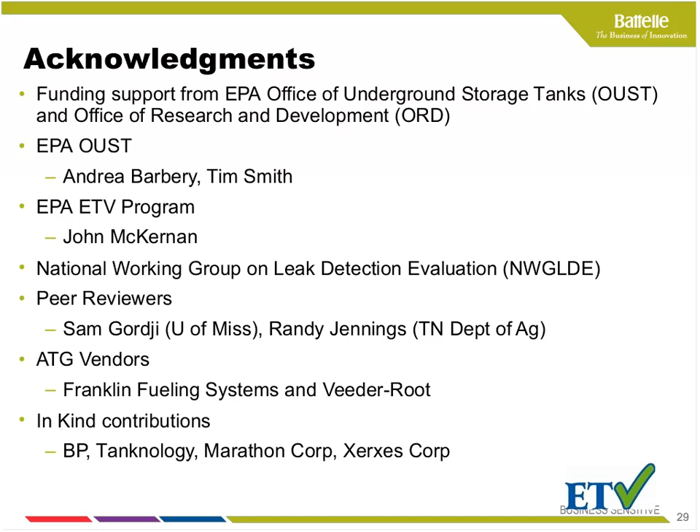Okay, so basically, you were wondering at this point, is that what you're saying, Brad? Did you monitor the water bottoms in the E15 blend to see if they would go away on their own over time, or did they remain constant without a fuel delivery? Yeah, so they remained constant as long as there wasn't a disturbance here. This was a good half an hour before we started the fuel dump, where it was pretty steady, and they were measuring that water.

Could I follow up with that question, Ann? This is Kevin again. You guys did not make any attempt to simulate an STP motor running in a tank like it would in the real world, did you? It's just sitting there absolutely still, right? Right. So the technologies have certain parameters when they're installed. They need to be so far away from an STP so that they're not influenced by that kind of agitation. That's a really good question, whether that distance would need to be different in an ethanol blend, or whether that would really even make a difference. It's a good thought. I think under this circumstance we were assuming that there wouldn't be that, but we did not simulate that at all.